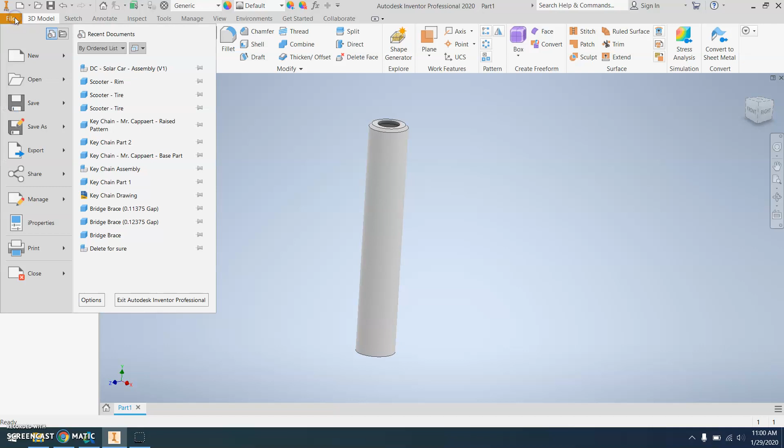So like always, File, New, Part. Change the units to millimeters. Hit Apply and then OK or Close.

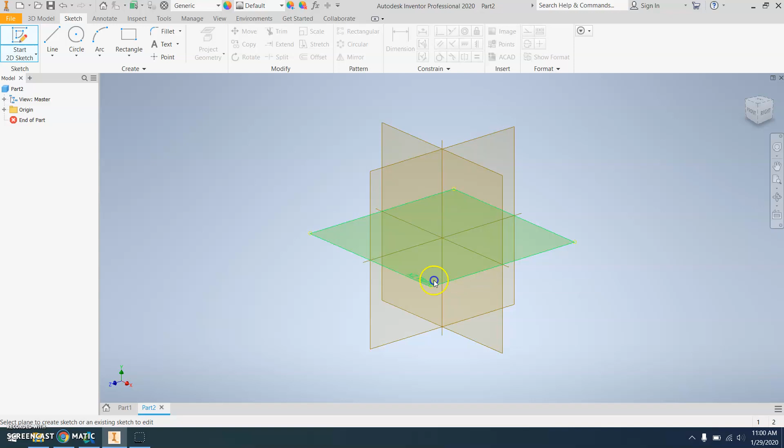Go back to sketch. You're going to start a 2D sketch. Choose this XZ plane. Use the circle tool to draw out a circle starting from the origin that has a diameter of 28 millimeters.

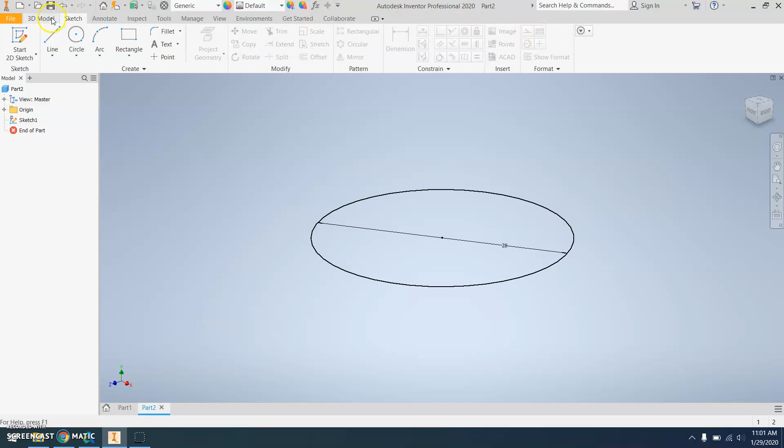All right. Zoom out. You're then going to finish this sketch and extrude under 3D model. So hit the extrude button.

It already knows what profile you want to extrude because there's only one profile there. If that didn't happen, just make sure you click on it to tell it what to extrude. You're then going to extrude it by 165 millimeters. Hit OK.

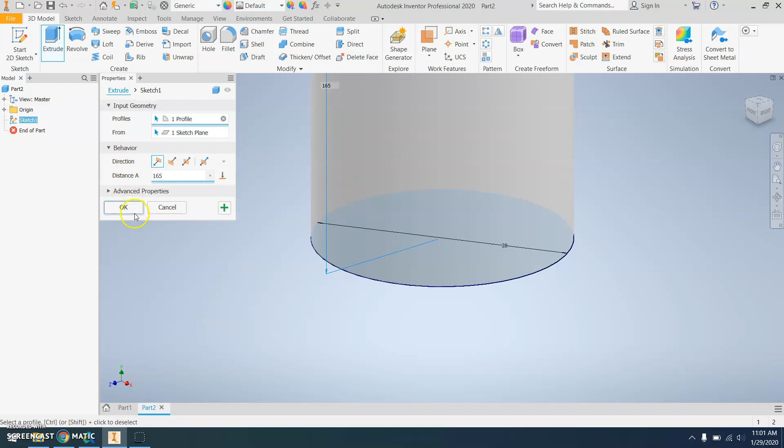Zoom out so you can see the top of this. Use chamfer, which is up in this area here. Notice it always has a description when you hover over it. That's kind of nice if you forget what tools do.

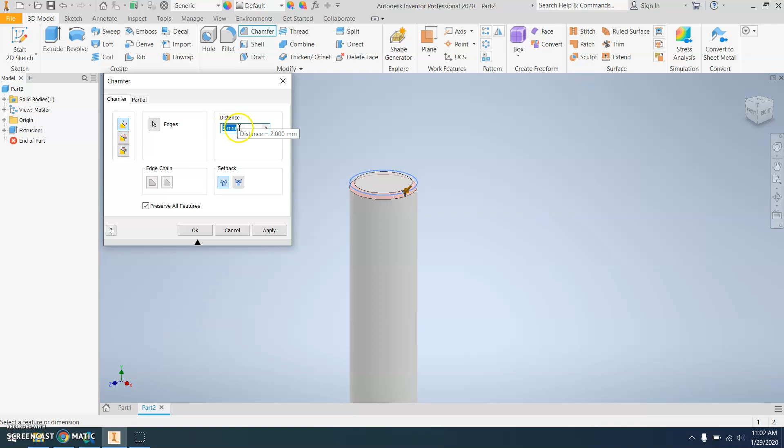You're going to click on this top edge, and yours might come up with a different number. It normally defaults to the last setting, and I already did a practice run on this. So make sure this is 2 millimeters, and then hit OK.

And then you're going to use a new tool that we haven't used before called Shell. Choose this top surface here of your steer.

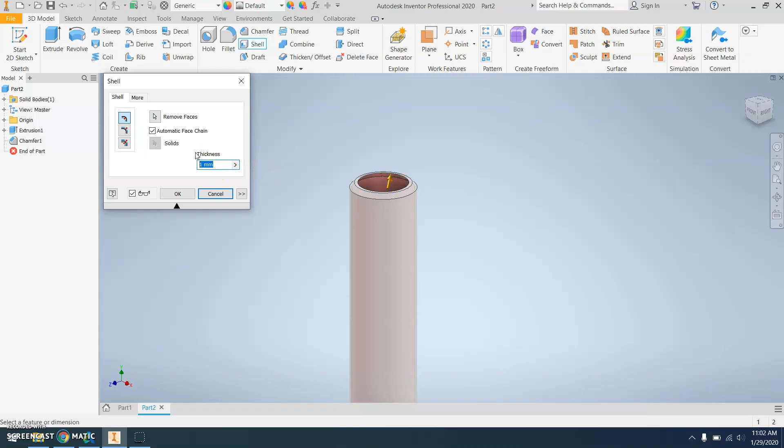You're then going to give it a thickness of 1 millimeter. Make sure that this is selected. And this is a weird tool.

Kind of annoys me because it doesn't ask how far down to go with this. And the videos that I saw online don't show. So we're just going to have to trust that it goes the right distance here.

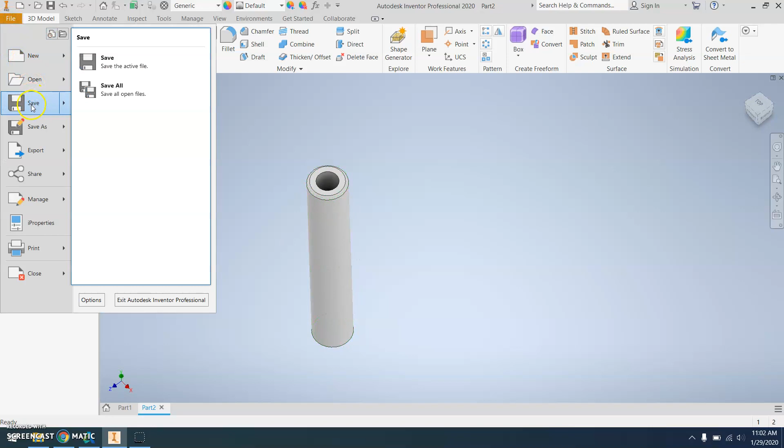Now make sure that you don't forget to save this. You need to be saving in your H drive each time. So remember, go to your H drive and then make sure you got a file set up for this, and then a name that makes sense. Put your name typically. This is the fork.